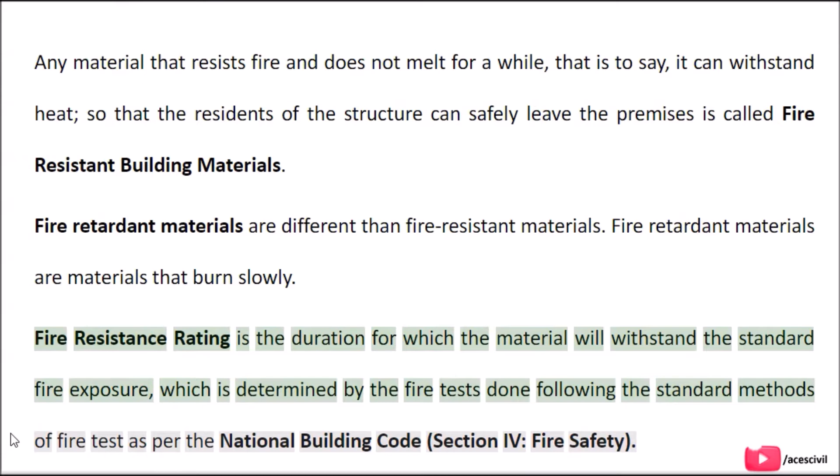Why is fire safety important? Architects, designers, and engineers nowadays are paying great attention to fire safety in buildings. Owing to a large number of accidents, fire safety in construction started becoming more and more important. To employ greater fire-resistant materials to a structure, attention began to be paid to the properties of the materials used.

The materials started to be evaluated for their resistance to a standard fire, and some standard tests were developed. Based on the duration for which the material did not show any major damage, the materials were classified. This classification can be accessed from the National Building Code.

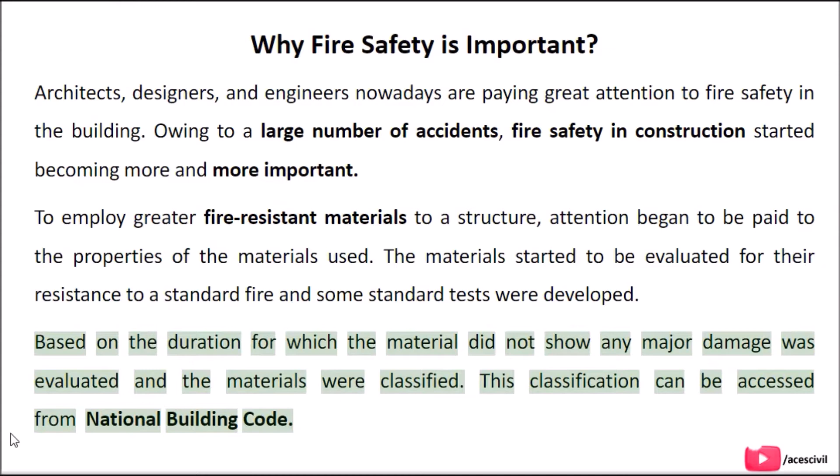General requirements of fire-resistant construction materials: It should be able to resist fire for such duration that occupants can safely vacate the building. It should not lose its strength considerably. It should have a low coefficient of thermal expansion, i.e., it should not expand when subjected to heat, preventing the generation of additional stresses in the building. Its thermal conductivity should also be less. It is preferable if it has self-insulation properties.

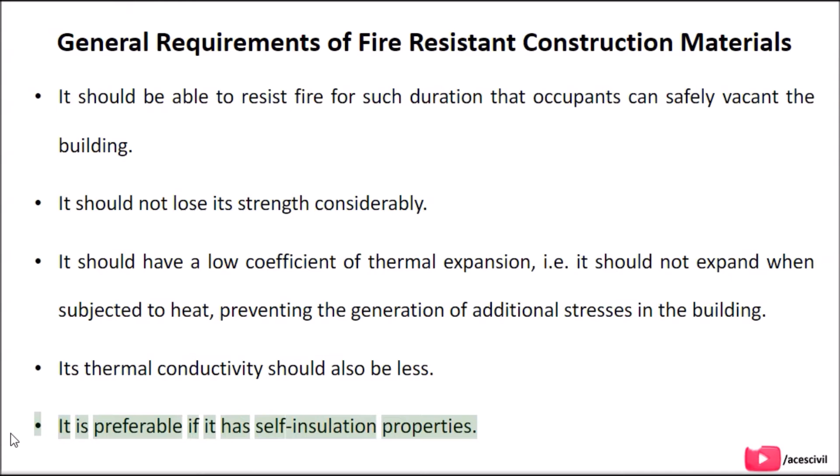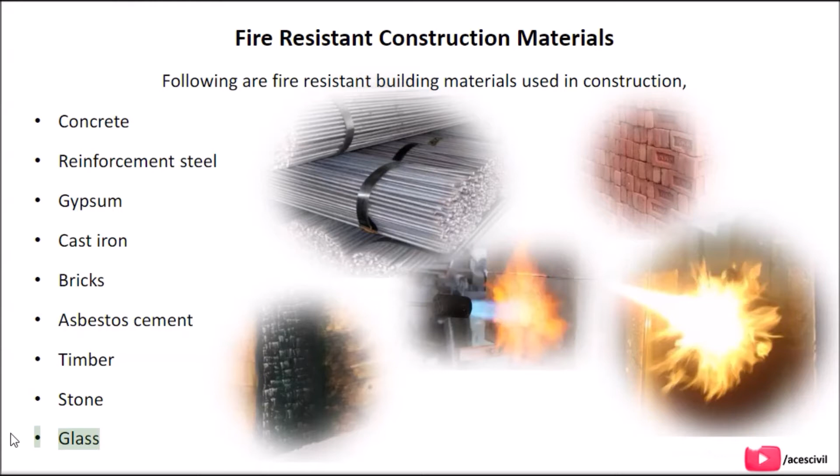Fire-resistant construction materials. Following are fire-resistant building materials used in construction: concrete, reinforcement steel, gypsum, cast iron, bricks, asbestos cement, timber, stone, glass, concrete.

Concrete is the most widely used building material in the construction industry for a long time. Its worldwide usage is double that of steel, wood, plastic, and aluminum put all together. Such a popular material worldwide, surely its fire resistance is also quite excellent. Concrete is an insulator in terms of transmission of heat, and as such offers greater fire resistance to buildings as compared to steel. Its thermal conductivity is also poor, i.e., the structural load-bearing ability is sustained for a longer period.

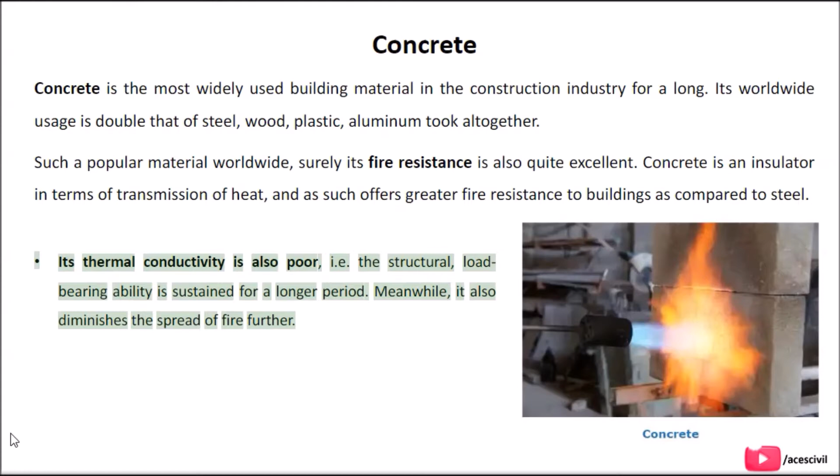Meanwhile, it also diminishes the spread of fire further. The melting point of concrete is not defined, but its strength decreases considerably at high temperatures. However, strength is not much affected up to 250 degrees Celsius. Normally, reinforced concrete structures can resist fire for about 1 hour at 1000 degrees Celsius.

Concrete also has low heat absorption power. Even if the outer temperature of concrete reaches 500 degrees, the internal temperature of the inner concrete remains relatively low. Hence, the weakening of concrete structures occurs only when intense fire for a long duration takes place.

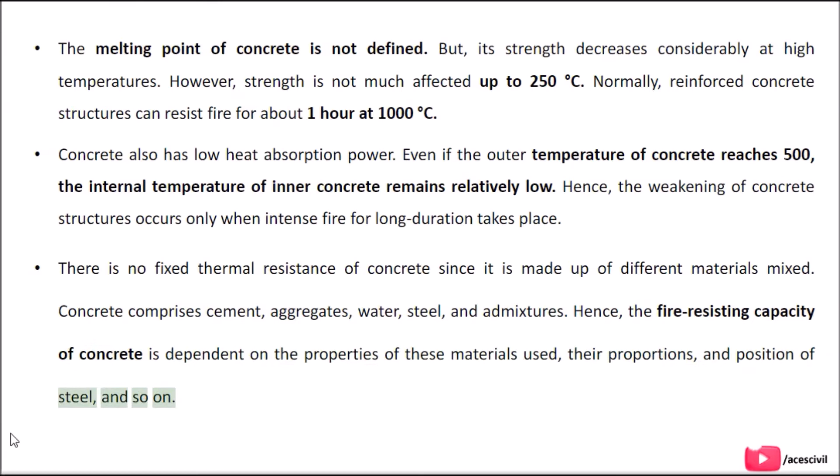There is no fixed thermal resistance of concrete since it is made up of different materials mixed together. Concrete comprises cement, aggregates, water, steel, and admixtures. Hence, the fire-resisting capacity of concrete is dependent on the properties of these materials used, their proportions, and position of steel, and so on.

When fire takes place, concrete is dehydrated, and heat causes aggregates to expand and cement to shrink. These opposite changes cause debonding amongst the constituents of concrete. This not only causes strength to reduce but also shrinkage cracks are induced.

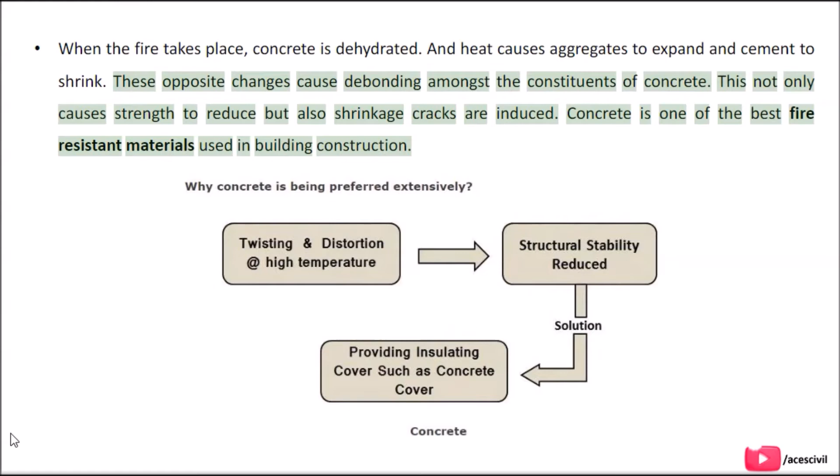Concrete is one of the best fire-resistant materials used in building construction. In addition to the reduction in fire load, it does not drip molten particles, as in the case of steel structures. It has a higher resistance to fire, ceasing the fire spread. Not only that, but it is also easy to repair after the fire, thus easing out financial concerns too.

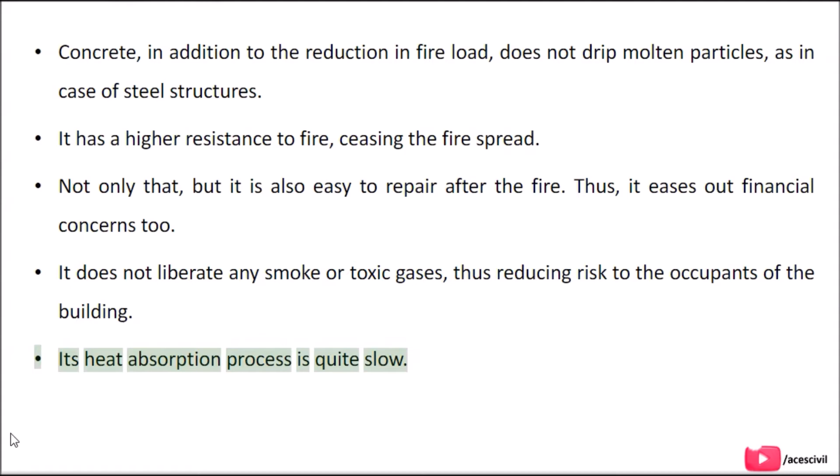It does not liberate any smoke or toxic gases, thus reducing risk to the occupants of the building. Its heat absorption process is quite slow.

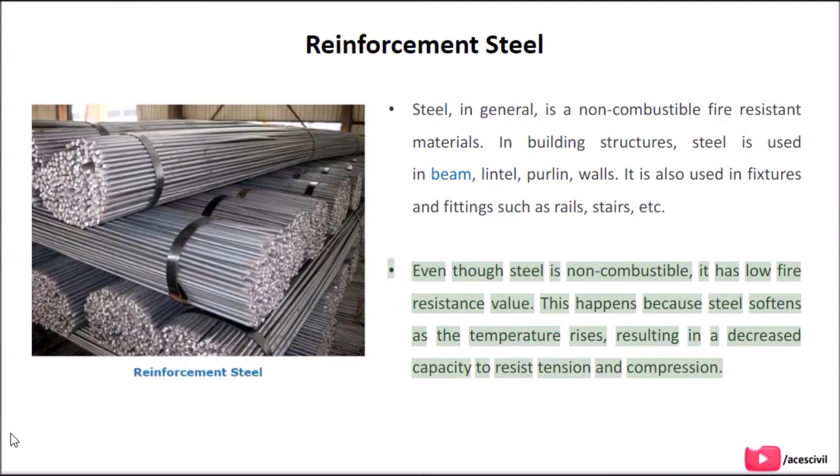Reinforcement steel. Steel, in general, is a non-combustible fire-resistant material. In building structures, steel is used in beams, lintels, purlins, and walls. It is also used in fixtures and fittings such as rails, stairs, etc. Even though steel is non-combustible, it has a low fire resistance value. This happens because steel softens as the temperature rises, resulting in a decreased capacity to resist tension and compression.

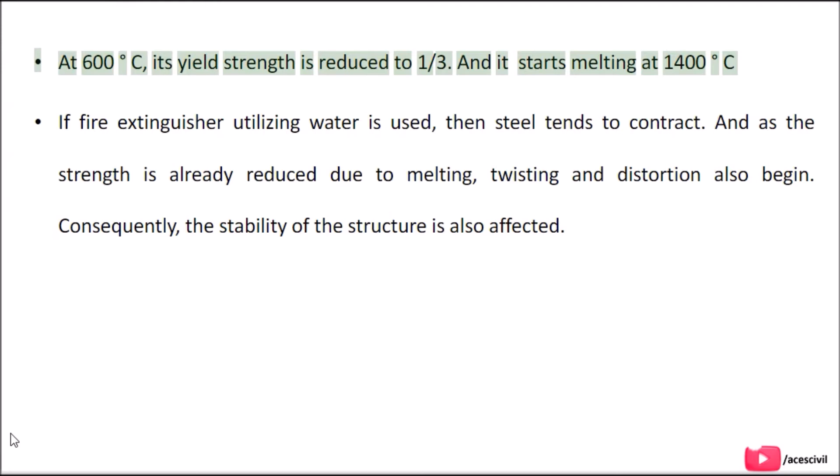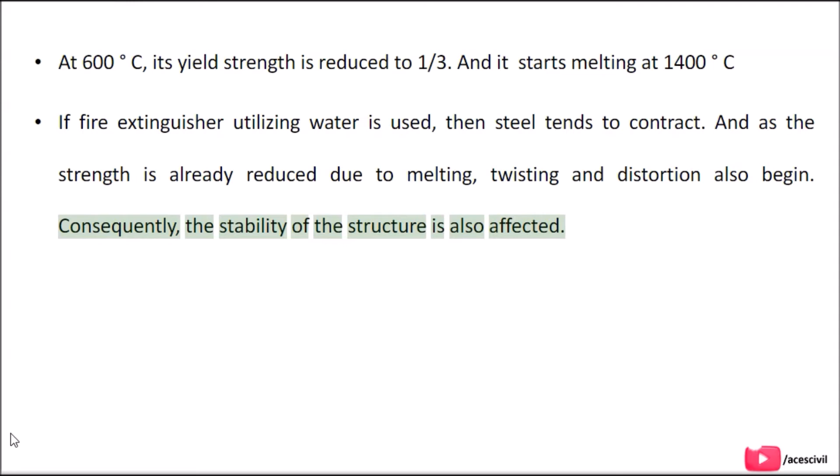At 600 degrees Celsius, steel's yield strength is reduced to one-third, and it starts melting at 1400 degrees Celsius. If a fire extinguisher utilizing water is used, steel tends to contract, and as strength is already reduced due to melting, twisting and distortion also begin. Consequently, the stability of the structure is also affected.

Bricks. Bricks are one of the oldest used materials since ancient civilizations. It is commonly used for construction of walls and pavement. In terms of fire-resistant materials, bricks do not show serious damage until a very high temperature of about 1200 to 1300 degrees Celsius. It is a poor conductor of heat.

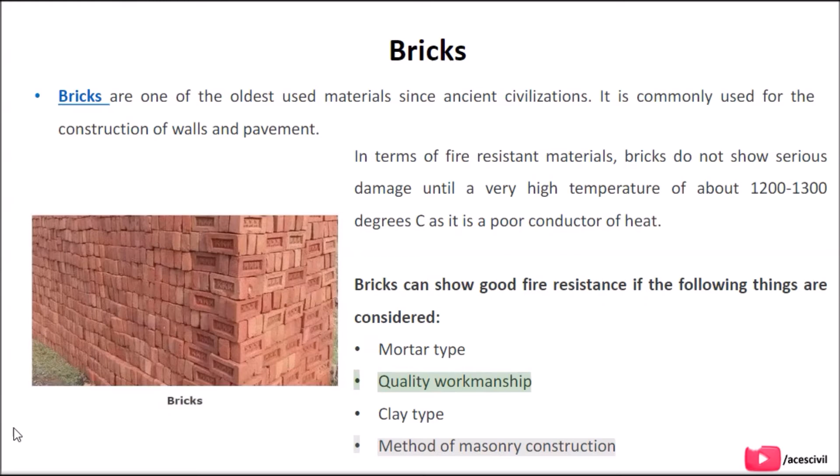Bricks can show good fire resistance if the following things are considered: mortar type, quality workmanship, clay type. Timber.

Timber has been used in construction even before history was recorded. Since ancient civilization, it has remained a major construction material. Timber shows considerable resistance to fire owing to its self-insulating property. When timber catches fire, it is first charred up to a certain depth, then the outer charred layer acts as a barrier and subdues the fire. This property to put out the fire on its own is characterized as the self-insulating property of timber.

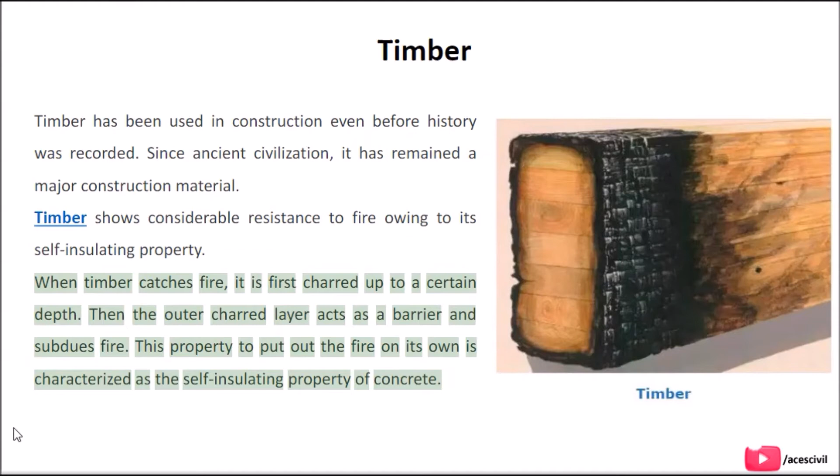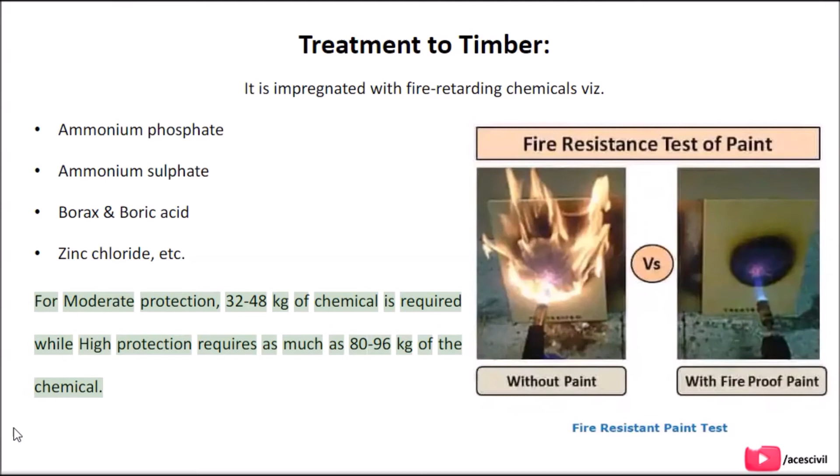Treatment to timber: it is impregnated with fire-retarding chemicals, viz. ammonium phosphate, ammonium sulfate, borax and boric acid, zinc chloride, etc. For moderate protection, 32 to 48 kg of chemical is required, while high protection requires as much as 80 to 96 kg of the chemical.

Recently, fire-resistant paints are used, consisting of asbestos, MgSO4, and iron oxides. How do the chemicals provide aid in fire control? They control the temperature rise during a fire and decrease the rate of flame spread.

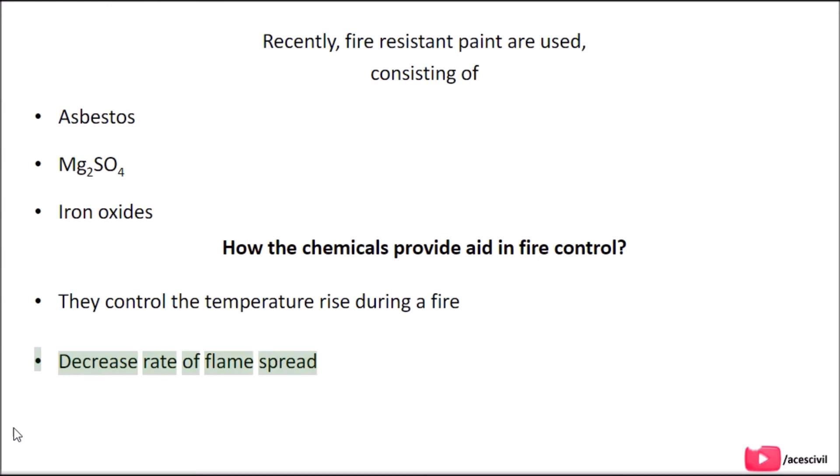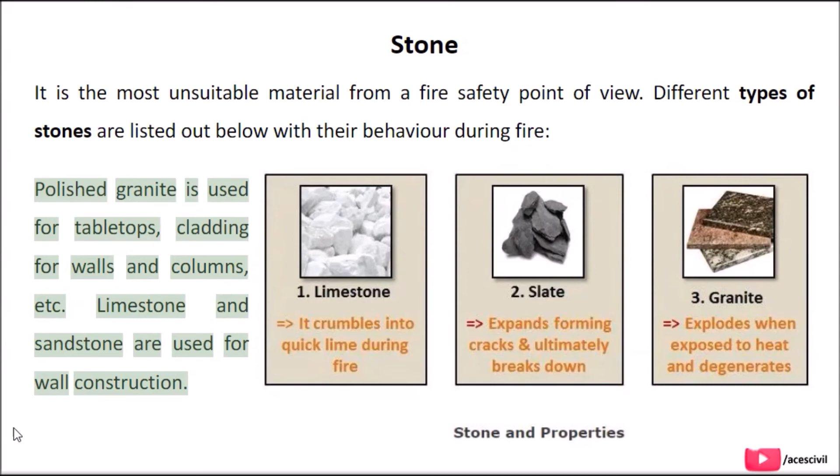Stone. It is the most unsuitable material from a fire safety point of view. Different types of stones are listed out below with their behavior during fire. Polished granite is used for tabletops, cladding for walls and columns, etc. Limestone and sandstone are used for wall construction.

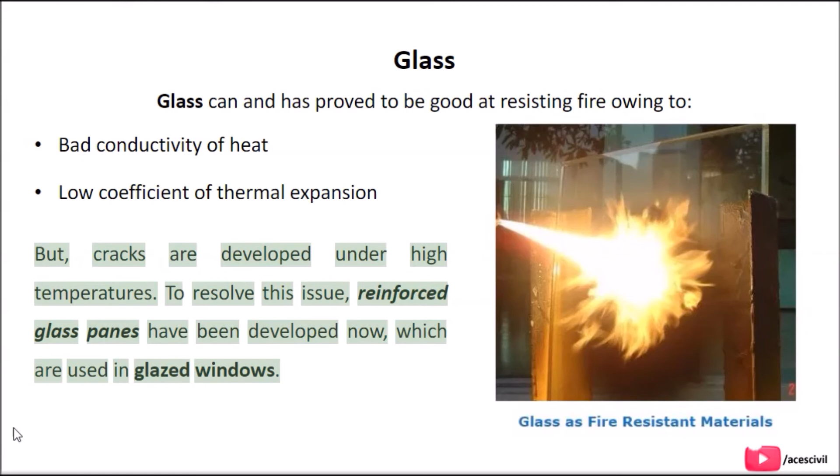Glass. Glass can and has proved to be good at resisting fire owing to bad conductivity of heat and a low coefficient of thermal expansion, but cracks are developed under high temperatures. To resolve this issue, reinforced glass panes have been developed now, which are used in glazed windows. The reinforcement in these glass panes holds the cracked pieces of glass together if the glass cracks.

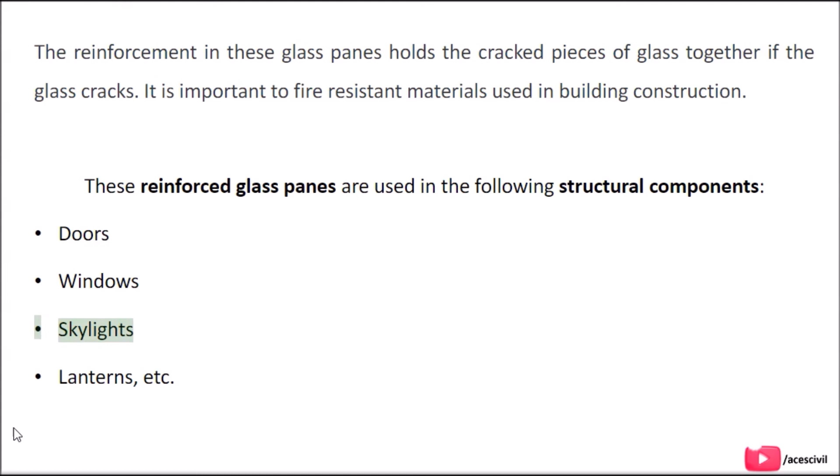It is important among fire-resistant materials used in building construction. These reinforced glass panes are used in the following structural components: doors, windows, skylights, lanterns, etc. Cast iron. It is rarely used in today's construction industry, for it flies into pieces when heated and cooled down suddenly.

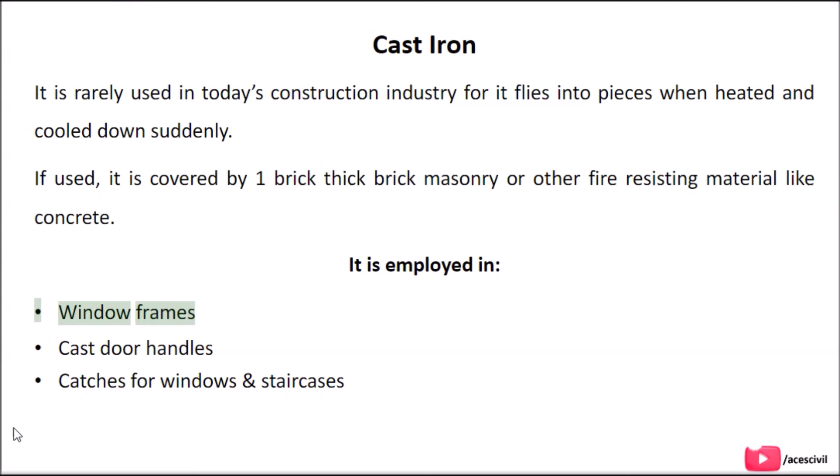If used, it is covered by one brick thick brick masonry or other fire-resisting material like concrete. It is employed in window frames, cast door handles, and catches for windows and staircases.

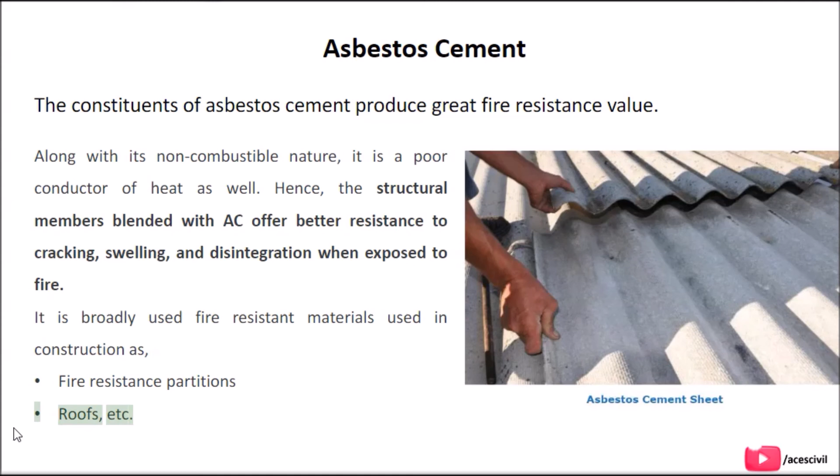Asbestos cement. The constituents of asbestos cement produce great fire resistance value. Along with its non-combustible nature, it is a poor conductor of heat as well. Hence, the structural members blended with AC offer better resistance to cracking, swelling, and disintegration when exposed to fire. It is broadly used as a fire-resistant material in construction, such as fire resistance partitions, roofs, etc.

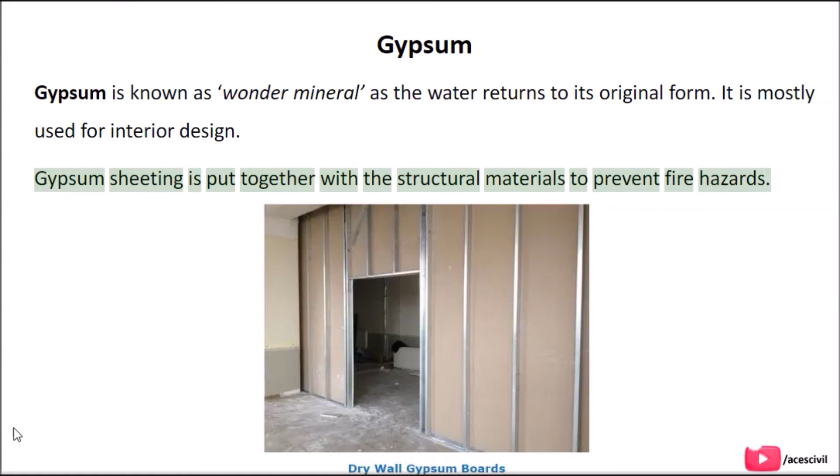Gypsum. Gypsum is known as a wonder mineral, as the water returns to its original form. It is mostly used for interior design. Gypsum sheeting is put together with structural materials to prevent fire hazards. The most commonly used gypsum derivative in the construction stream is gypsum board, or commonly called drywall.

It comprises a gypsum sheet inserted between paper sheets. Out of that, Type X drywall is the most popular one. It is also one of the important fire-resistant materials. The drywall has a paper layer which burns slowly, not contributing to the fire spread. The incombustible core consists of chemically combined water with CaSO4,

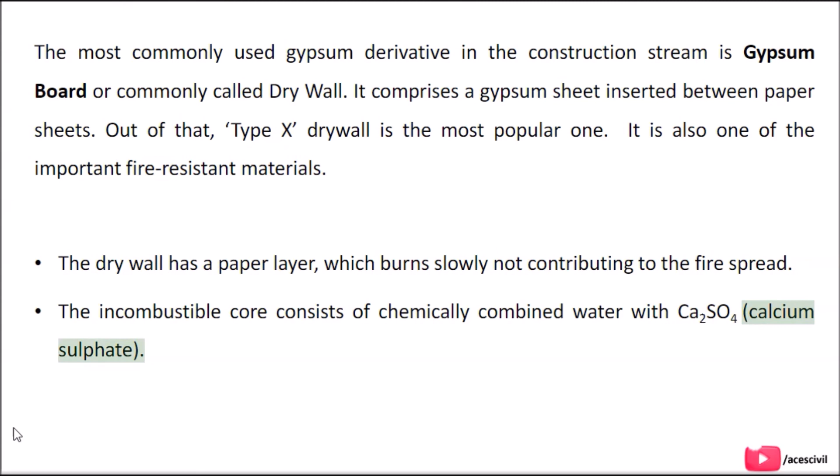calcium sulfate. When a fire takes place, this water comes out in the beginning in the form of steam and hinders the heat transfer through the gypsum board. When this steam flow halts, the gypsum board continues to resist fire.

To obtain increased fire resistance, multiple layers of gypsum boards are used. Above are all the fire-resistant building materials used in construction. These are also the most used building construction materials around the world.